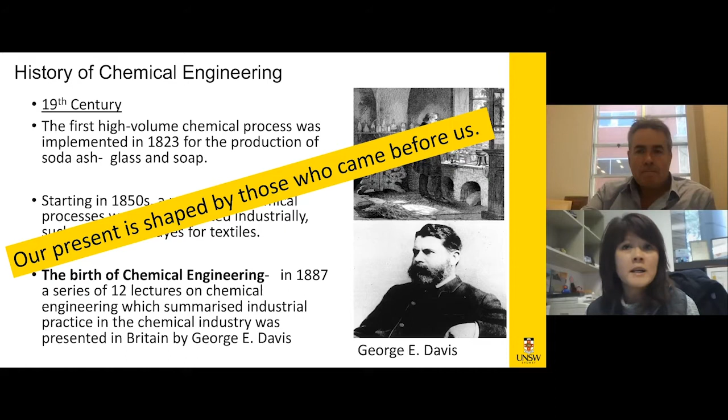When we're talking about the past of chemical engineering, the history of chemical engineering, you always hear the name George Davis. I'm sure during these last few days you've already heard his name and about the birth of the chemical engineering field back in 1887. I just want to stress that we can learn a lot from our past. Our present is shaped by those who came before us, and our future is also shaped by what we learn from the past and present times.

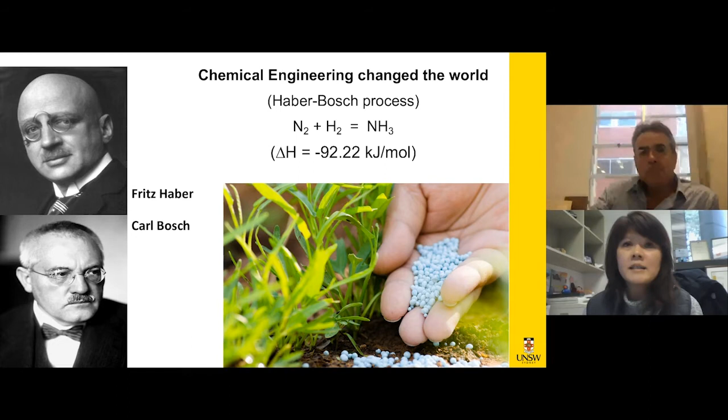As chemical engineers or chemical engineering students, I'm sure you've heard of the Haber-Bosch process. If you haven't, you need to check it out, because you will not be able to graduate chemical engineering before knowing the Haber-Bosch process. This is probably the most significant breakthrough in chemical engineering, a process that changed the life of everybody in the world. It requires a lot of energy, but it sustains life on our planet.

That's the reason we have 7.8 billion people now in 2020. The Haber-Bosch process was actually developed back in 1900, when we only had 1.6 billion people, and the population has grown thanks to the ammonia produced from this process. So today, when I'm talking about energy, I think it's important to reflect on this process, because it requires a lot of energy. As chemical engineers, we need to rethink how to develop more sustainable processes, to make sure we have a way of life and processes that are sustainable, and that we'll be able to make a better future.

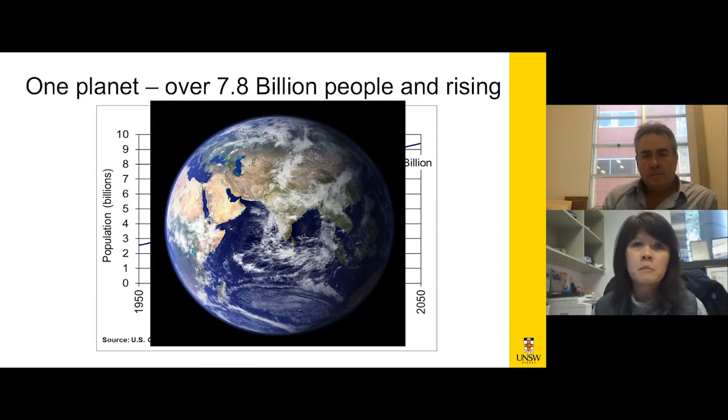I'd also like to show this slide, taken from ChemEng Matters, Chemical Engineering Matters, just to stress that chemical engineering does matter. The processes that we learn and develop are actually used in our daily life. Over the last couple of days, you've already talked about water. Chemical engineering processes are very important for solving the global challenges - water, energy, food and nutrition, and health and well-being. Chemical engineering is a vital part of this jigsaw of our 21st century living.

Today my talk, as Tom and Olivia already mentioned, is about Power to X, or another way I can call it is harnessing the solar energy for chemical processes.

Since the beginning of my research career, I've always been passionate about research for sustainability. When I started, I was looking at how to develop chemical processes that can solve environmental problems, which is why I worked on water purification. The science and principles there can also be used for energy applications, and that's how I started my work in energy.

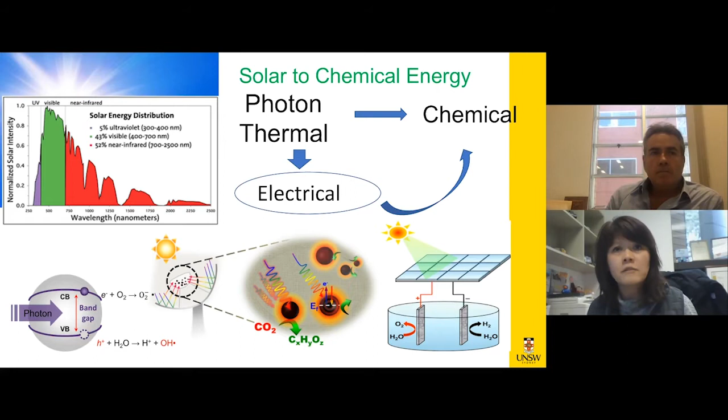In my research, I'm actually looking into designing catalyst materials—unfortunately the animation doesn't work, but what I'm trying to explain is there are a lot of ways to do this. Again, chemical engineering skills are very important here; there are many ways we can make catalysts.

One way is flame synthesis, where I use the flame as the reactor to make the particles. The design of the catalyst is very important, because it's one of the keys to effectively harnessing the sun's energy and converting it to chemical energy.

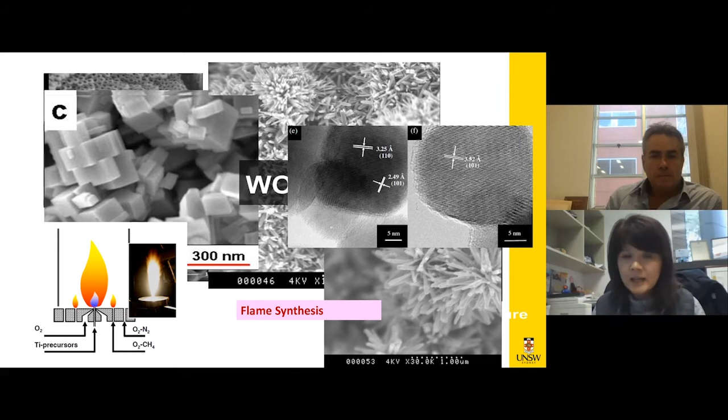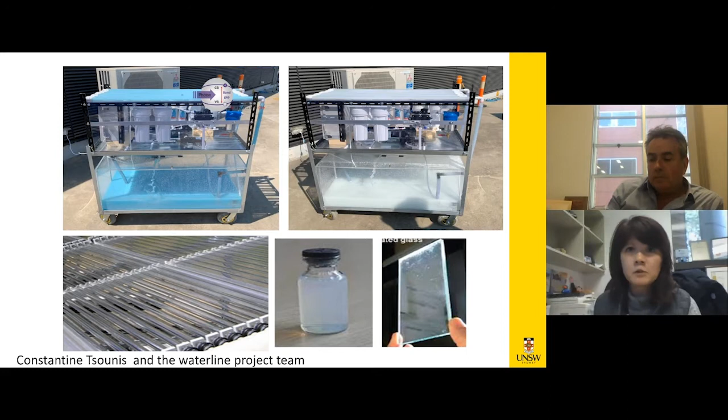As chemical engineers, our work isn't just designing the catalyst—we also have the skill to design reactors and build the reactor system. This is very important because it differentiates us from chemists or material scientists: our capability to design a reactor system in order to really drive the reactions effectively.

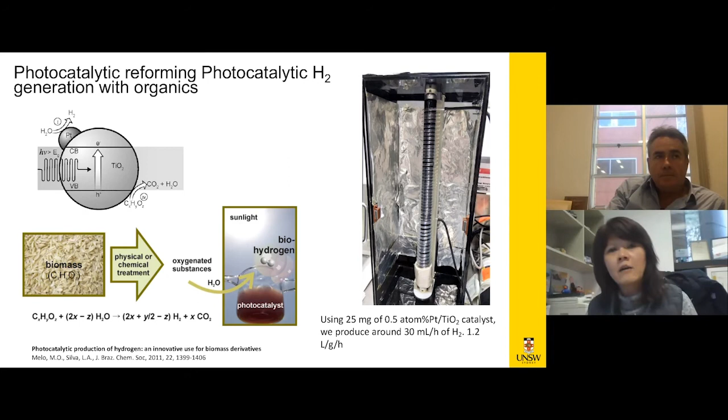Other ways of harnessing solar energy to convert it to chemical energy, like making hydrogen, include converting biomass and waste materials to extract hydrogen from it. We can use sunlight directly with a catalyst to extract hydrogen from biomass, or use sunlight to generate electricity, then use that electricity and a catalyst to convert biomass to hydrogen. So we're using abundant solar or renewable energy, combined with chemical engineering processes and designed catalysts, to extract the hydrogen.

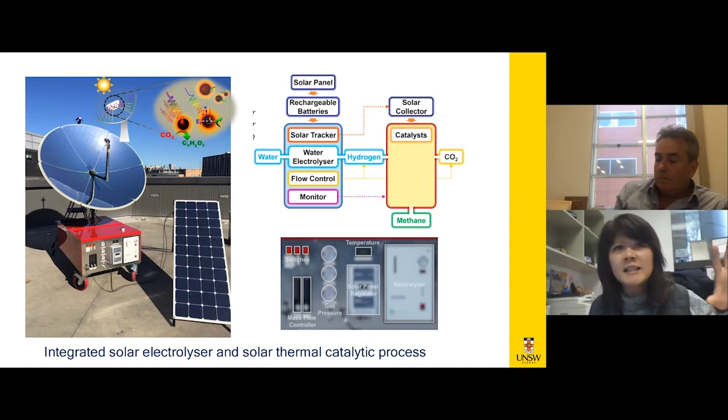So in this process, the main ingredients are water, carbon dioxide - which is waste we want to get rid of anyway - and energy from the sun only, and that can be used to produce methane. Methane is a chemical building block for a lot of chemical industry, and it's also an important gas for energy purposes. So that's one of our power-to-X examples, harnessing both the heat and light of the sun to drive the reactions.

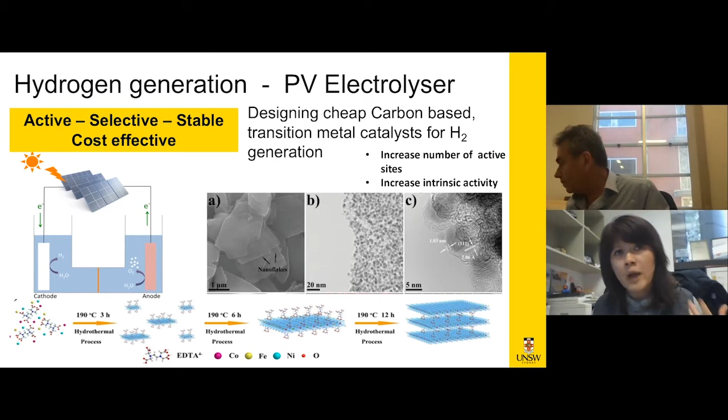Another project we have looks at harnessing solar energy to convert to electricity, then driving a catalyst process to produce hydrogen. A lot of our work focuses on making hydrogen this way, and on designing active, selective, and stable catalysts. These are the key things important in chemical industries - we have to be cost effective, stable, and selective for the chemical reactions we want.

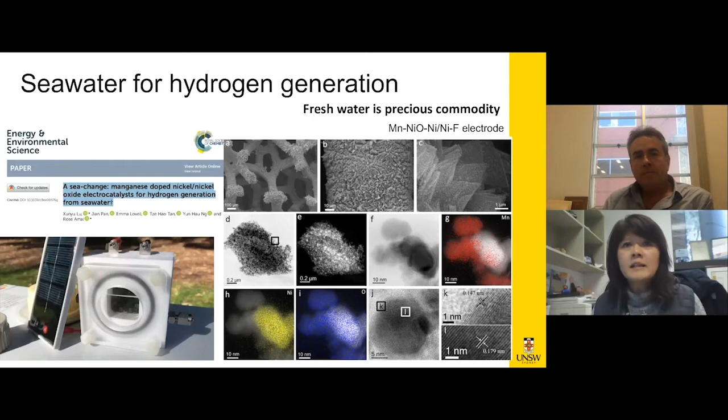When we talk about these processes, we also have to think about sustainability. Fresh water, especially in New South Wales, is a precious commodity, so when talking to industry, one issue is whether you actually have water to use as a raw material. But we have plenty of seawater, especially in Sydney since we live in a coastal area. So we're also developing ways to convert seawater and use it as our source for making hydrogen. Designing the catalyst system for this is very important because seawater is much harsher than fresh water.

And this is very important because I think this is the future of chemical processes, looking at converting small abundant molecules to chemical products rather than relying on fossil fuels. A lot of the things that we're doing currently in the chemical industry rely on fossil fuel, for example, to make syngas, or steam methane reforming to make hydrogen. But we can also look into other things that we have in abundance, like the carbon dioxide that comes out from the chemical industry. And by doing that, we can actually close the carbon loop as well. So I think it is important for us to really look into what we can do in the future, utilizing our renewable power.

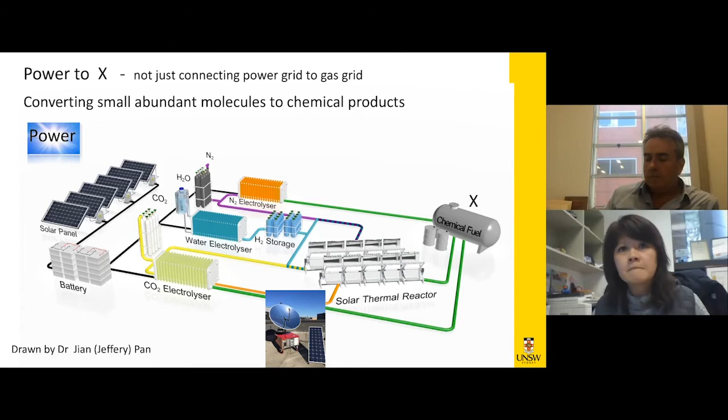At the beginning of my talk, I mentioned the Haber-Bosch process, ammonia synthesis. This process has been there for more than 100 years. So the process was there yesterday, for 100 years, and still today, but it's a technology of yesterday. They get the hydrogen from methane, the steam methane reforming, and the methane is actually coming from fossil fuel. The nitrogen is coming from the air, so that's fine.

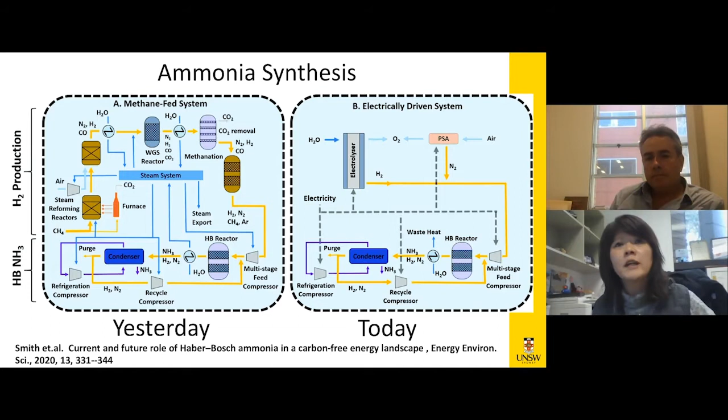Today's technology, which a lot of the industry started to look into, is instead of using methane to extract the hydrogen, they're looking at using an electrolyzer to get the hydrogen. The hydrogen from the electrolyzer then reacts in a similar process to the Haber-Bosch process to produce the ammonia. So instead of using fossil fuel, now we can use clean, green hydrogen to make our ammonia.

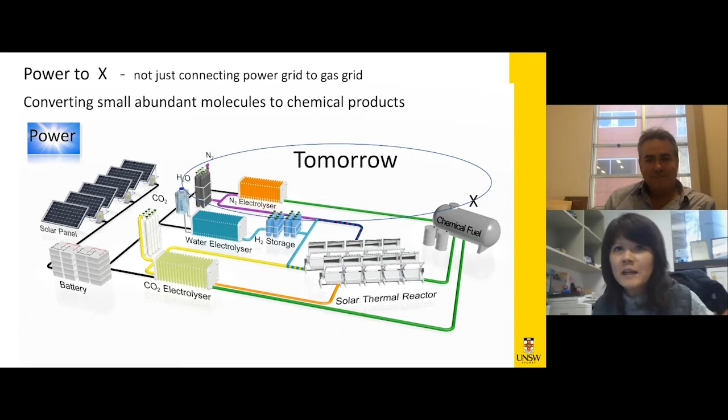And what I see in the future, the tomorrow way of making ammonia to sustain life, is that we can also use nitrogen, but instead of having to use high pressure, 200 atmospheres, and high temperature, 450 degrees Celsius, we should be able to use an electrolyzer with renewable power and operate at low temperatures and low pressure to convert nitrogen and water, using the catalyst in the electrolyzers to produce ammonia. This is something I foresee perhaps not immediately tomorrow, but maybe in 20 years' time, and the chemical engineering students here will probably be the ones who develop this further. So with that, I'd like to thank you, and I also thank my group members, including Con.

For me, I consider myself the past already, my group members the present, and you, the audience, the future of chemical engineers, and I believe that the future is bright. This particular quote is from Svante Arrhenius. I think you all know the Arrhenius equation, which relates the reaction rate constant with temperature. In 1900, he said humanity stands before a great problem of finding new raw materials and new sources of energy that shall never become exhausted. In the meantime, we must not waste what we have, but must leave as much as possible for coming generations.

It was supposed to be an animation here, and I was not supposed to show you Arrhenius first. I was supposed to show you the quote and get you to reflect that this quote is very relevant for today, and I'm sure it's going to be relevant for tomorrow. But it's actually a quote that Svante Arrhenius posed over 100 years ago.

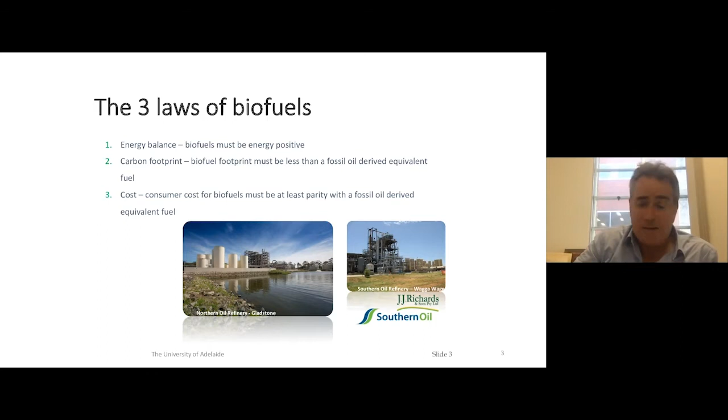And basically, it's got to make money. So a company is not going to use or produce biofuels unless they can make a profit. This is the big challenge.

So what's a good feedstock? So we've been looking at hydrothermal liquefaction, which is a high temperature, high pressure reaction where we put organic material to a high temperature of 350 degrees Celsius and a pressure of around 200 bar. So we take the wet biomass to just below the critical point of water. Through the heating curve to that point, we get depolymerization of the organic materials and they reform into a crude oil-like product. So it's a very interesting process, very complicated, but it will turn wet organic material into a crude oil that can be further refined.

So I mentioned before that we were looking at microalgae as a feedstock for biofuels. It's too expensive to grow algae for fuel. But during that journey, I came across hydrothermal liquefaction, but we also came across biosolids. So biosolids are dried municipal wastewater sludge.

So during a conventional wastewater treatment process, we grow bacteria to remove soluble organic material, carbon, from the wastewater. So we grow the bacteria in the water to clean the water, but we produce biomass. This is called sludge. And the sludge has to be removed from the wastewater treatment process, and it's a big waste problem for the industry.

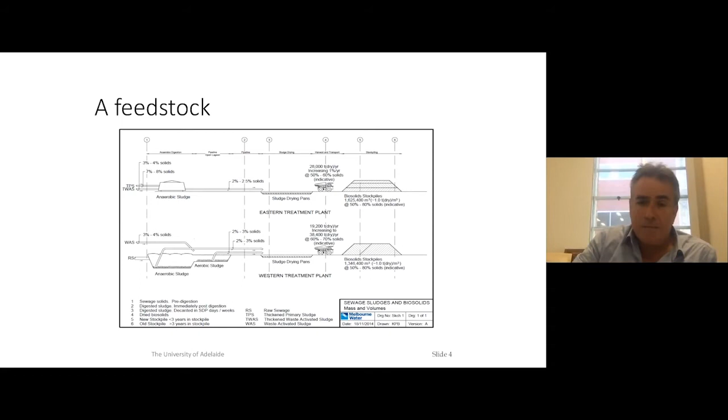It's left there for about a year for the water to evaporate, and then the remaining sludge is scooped up and stockpiled. So these stockpiles are massive, and they self-combust in summer because they're so full of energy. Typically, they're around 40% inorganic material, but the older stockpiles get as high as 70% inorganics. So they're quite variable, but full of high-energy organic material.

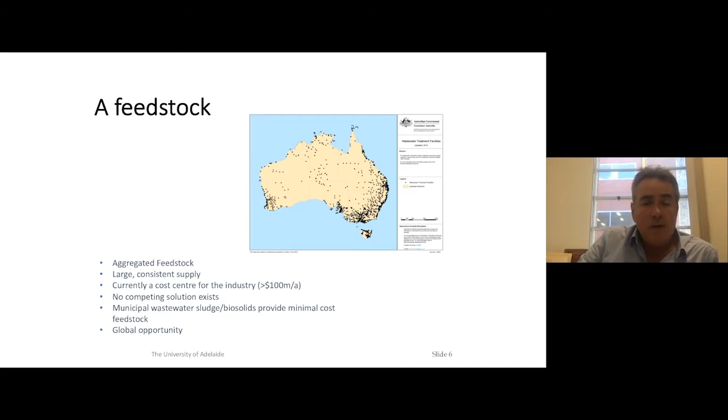So if we look around Australia, biosolids are produced all around the country in different volumes. The economics, really, we need to be looking at the larger stockpiles to consider converting those wastes to a fuel to be economically viable. But globally, it's a massive opportunity and a massive problem. So the industry spends around $100 million per annum just managing biosolid waste. So it's a great opportunity to come up with a new waste management tool, but also to convert this waste into something useful.

So the challenge that we've been undertaking for the last few years is trying to develop a technology based on hydrothermal liquefaction that is scalable and can take this feedstock and convert it into a renewable crude oil in a continuous process. We've worked at different scales from bench to pilot to commercial demonstration, and the economics so far, we would require a tipping fee of around $160 per dry tonne of biosolid waste.

So I showed you a picture where the material is produced around 2 to 5% solids. So you can imagine to get a tonne is going to take a lot of litres of the sludge waste to get that tonne of biomass that would require only $160 to be paid to dispose of it. So it doesn't sound much, $160 a dry tonne, but it is a lot of money for the industry. So if we were to just convert this biomass into oil, the economics probably wouldn't stack up. So we need to look at valorizing all of the product streams, and I'll talk a bit more about that.

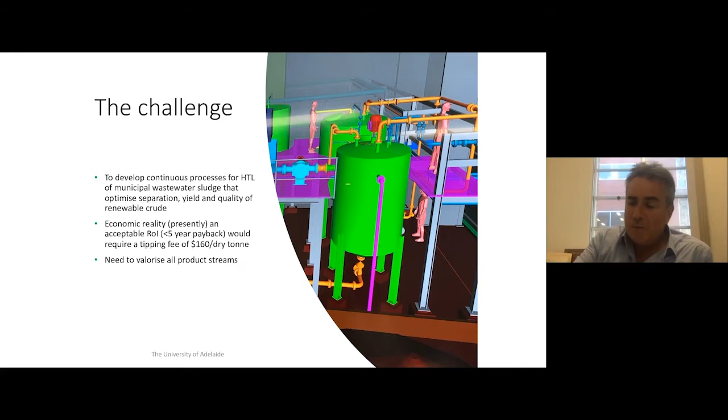And another economic reality is businesses are interested in this technology, but businesses nowadays would like a return on investment in a period of 5 years or less. So that's a big challenge. Investors want their money back as quickly as possible and are not interested in long-term investment where the payback is greater than 5 years. So that's quite challenging.

But one of the challenges of putting these types of waste through hydrothermal liquefaction is it's not just organic material. It's all the inorganics. It's all the heavy metals. So you've got quite a contaminated aqueous phase post-HTL that needs to be managed. And you have to separate the crude oil from that aqueous phase, which also is not trivial. But once you've separated the oil component, that can be readily refined in the standard refinery processes.

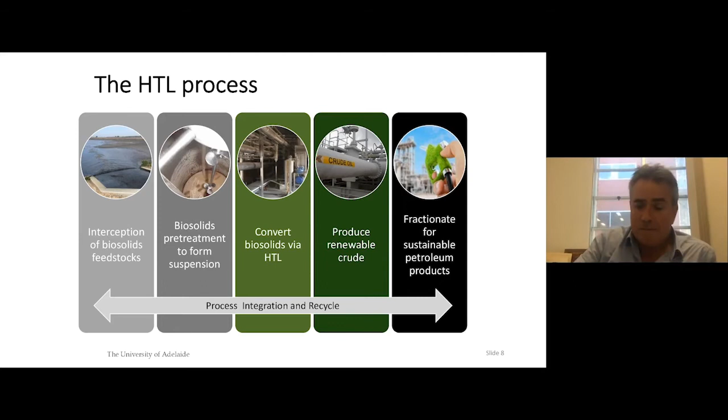So we're currently funded by ARENA to build and operate this demonstration plant. Our industry partner, I should have mentioned it before, is Southern Oil Refining. So this company is based in Wagga and they have an oil refinery in Gladstone, Queensland. Their business was built on waste to value.

So most of their business is recovering dirty lubrication oils, removing the contaminants, and reselling the lubrication oil back to the market. So lubrication oils don't lose their lubricity when they're used, they just become contaminated. So you can imagine in Australia, we use a lot of lubrication oil in the mining sector and the heavy transportation sector. So Southern Oil is about a $100 million business, and they are quite successful at recycling waste oils.

One of their wastes is dirty fuel. So they got interested in renewable fuels to add value to their dirty fuel that they recover from lubrication oils. So I've been working with Southern Oil for a few years now, developing the hydrothermal liquefaction technology for managing the biosolid waste streams.

So one of the challenges about developing new technology is what we call the valley of death. So at universities, we have a great time, we get research grants, we can do wonderful things, but we work at early development stages. So we call it technology readiness levels. It's a term that we've plagiarized from NASA. So they talk about TRLs. TRL 1 is pure research. TRL 9 is when you're about to commercialize your technology. So as researchers, we work around TRL 1 to 3.

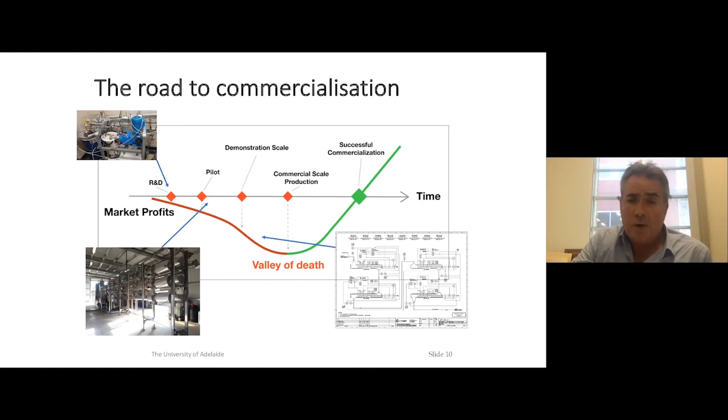It's very challenging. Fortunately, in Australia, we have ARENA who fund projects in the valley of death. The government realizes that to get private investment to develop new technologies is very difficult in Australia. So they created ARENA many years ago that will fund renewable energy projects through that valley of death.

So every day, B-double trucks are filling up with this waste, going off to a landfill to dispose of this waste. I believe they pay about $130 a wet ton. So they're very concerned about us needing $160 a dry ton to make hydrothermal liquefaction viable to manage their waste. And this is why we have to look at other products in addition to a renewable fuel.

So we're looking at these different biosolids wastes. We're looking at how do we integrate hydrothermal liquefaction technology into a standard wastewater treatment plant. We're looking at the effect of the polymers that the industry uses and how does that affect the oil quality. As I've mentioned, in the 20% solids, you've got 80% water. We don't want the water.

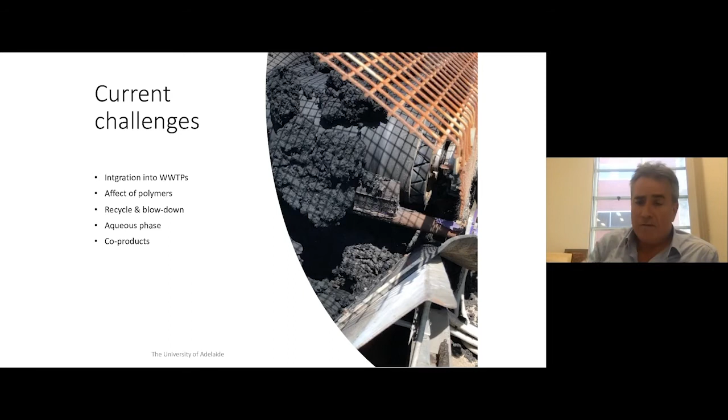So I've got about 8 PhD students currently working on the different areas of research around HTL. We're now very much interested in catalysts that we can add to the HTL reactor to improve the quality of the oil, to remove heteroatoms such as nitrogen and sulfur, reduce the acidity, etc. So there's still a lot of R&D to be completed with HTL in parallel to scaling up the technology.

So I'd like to conclude my talk. And I'm sure Rose is the same, she said this, that the young chemical engineers, which is you, will change the future. We need you to design and operate sustainable processes. And as you know, it's getting harder and harder to get career jobs nowadays. So really, as young engineers, you need to create your own jobs, create your own companies. And the solution is if we can produce cheap, clean, renewable energy, this will drive the future economies of the world, and I think that is your challenge.

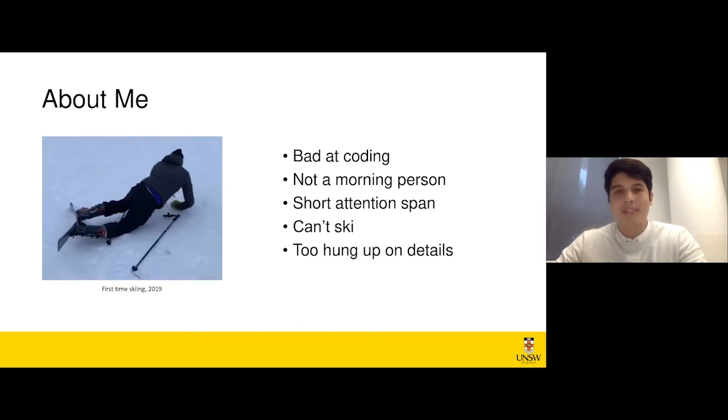And it's really about playing with your strengths, acknowledging your weaknesses, and just being yourself. So over the last couple of years, something that I've learned is to just really be calm and confident and be yourself, and you'll be fine at the end of it. And the mantra goes fake it till you make it. And I used to believe that, and I used to think that was something that you needed to do to fit in. But as I have grown personally and professionally, I realized that just being yourself is key, and being able to laugh at yourself is something that's really important. So if you ever feel out of place, don't. Everyone's really in the same boat as you.

And so I want to talk a little bit about Power-to-X, and Rose introduced this really well earlier, so I won't add too much detail to that here, but this is sort of what chemical engineers' fantasy is in terms of how we can integrate renewable energy generation into viable chemical processes.

Right now, Australia is one of the world leaders in terms of solar cell development. We can make really, really efficient, cheap solar cells that produce really cheap electrons, and you can get these electrons for less than 3 cents per kilowatt hour nowadays. So if we want to really integrate renewable energy into industry, we need to make sure that we have the processes that are available for that.

Not everything can be electrified. So, for example, we can take those electrons from the renewable energy generation. We can pass them through a water electrolyzer to produce hydrogen. We can pass them through a nitrogen electrolyzer to produce ammonia or fertilizer, as Rose talked about before. Or we can even use waste CO2, and with those electrons, create things like methane, methanol, formic acid. All of these things are really important energy carriers and fuels and chemical feedstocks that we can use in industry. So by using this sort of P2X pathway, we're really coupling the end need - for example, a chemical feedstock which can be used to synthesize other chemicals, or used as a fuel directly - with the really cheap electrons that we get from the renewable energy side of things.

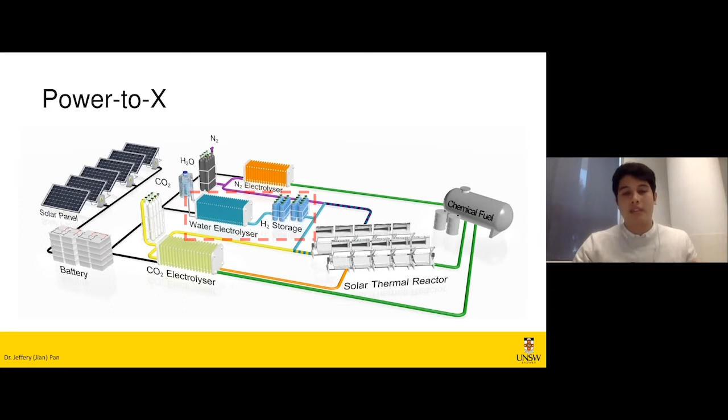So for that, we really need to maximize the use cases of these end chemicals. I'll be focusing a little bit on hydrogen here. I find hydrogen really interesting because it's sort of the cornerstone of the whole P2X concept, where hydrogen can be used as a chemical feedstock to make other things like fertilizer, methanol, urea. You can use it to heat things up directly for industrial processes or even domestic heating. And you can use it as a fuel as well, so it's a great replacement for diesel once we have the infrastructure up for it. You can even use it, or they're trialing applications, in aviation.

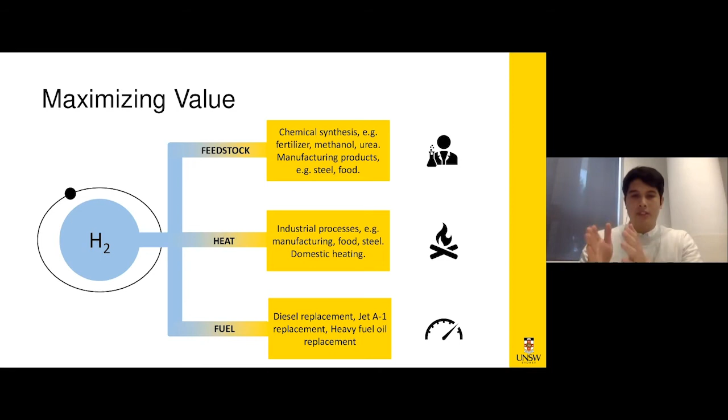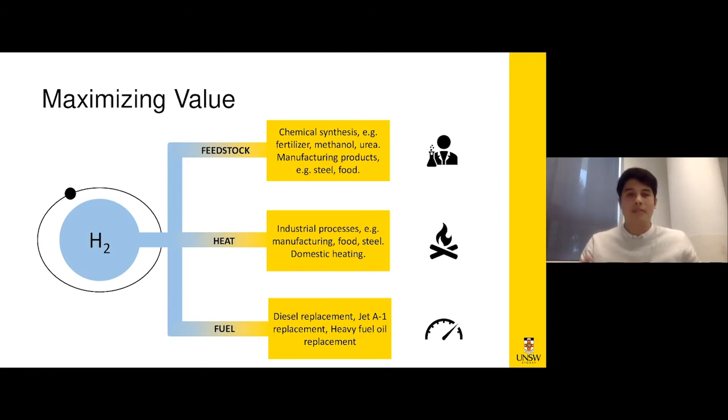So what that really means is that the economics of that P2X pathway doesn't really fall down to just hydrogen as a commodity on the commodity market, because that would be worth very low amounts, but rather what hydrogen can be used for. For example, if it's replacing diesel and it's cheaper than diesel, the cost is not so much how much you can sell hydrogen for, but how much money you save by using hydrogen as opposed to diesel, which is quite expensive, as Professor Lewis was talking about before.

So what you'll find is that there are two main factors that really define how much hydrogen is going to cost to make. Firstly, the average price of electricity, which, as I mentioned, because we have so much solar capability and we're really driving the cost of electricity down, we'll leave that to the PV guys to sort out. But the other thing we can have control over to make this process cheaper is reducing the amount of electricity required per kilogram of hydrogen. At the moment, industrially, it's about 50 to 55 kilowatt hours required per kilogram of hydrogen. But if we can drive that down even to 45 kilowatt hours per kilogram, we can really reduce the cost of hydrogen to about $2 per kilogram, which is what the National Hydrogen Strategy wants us to aim towards.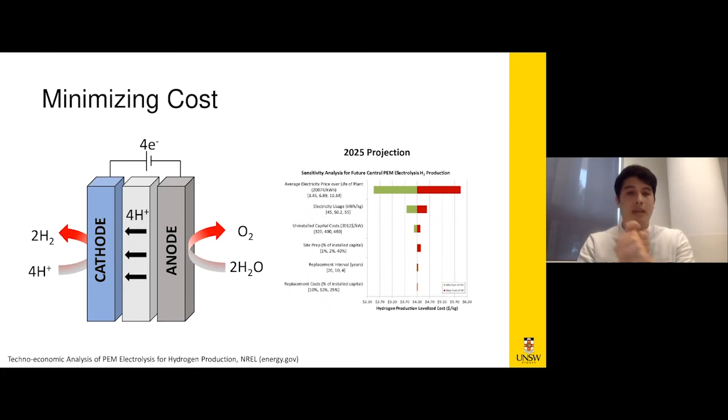So in order for us to really realize P2X as a real possibility, we need to, A, make sure that we're using the right hydrogen in the right use cases and applications, and B, that we can minimize the cost of hydrogen production.

And this is where SwitcH2 comes in. I might add that during our final year design project, when I was an undergraduate chemical engineer, we were required to optimize both the carbon footprint and the cost of a very large brewery operation.

That inspired us to dig a little further and think about the challenges a brewery actually faces. The first is that they require so much energy, about 40 kilowatt hours per 100 liters of beer, equivalent to about 75 kilograms of carbon dioxide released per hectoliter of beer. And when you think about the distribution chains of a brewery and how much wastewater is produced, it's about 5-to-1 wastewater per liter of beer produced, and that's all really rich, highly concentrated organic waste with really high enthalpy behind it.

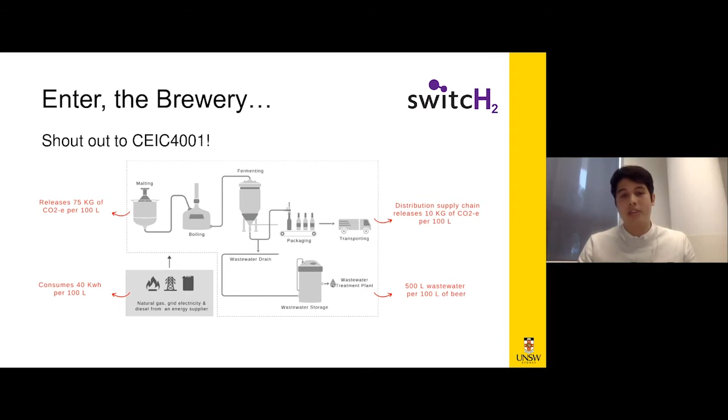You can start to see a problem there. So the opportunity came for us when we realized that most of the energy demands for a brewery are actually satisfied currently by natural gas and LPGs. These are liquid and gas energy carriers.

When the brewery operates at nighttime, when they don't have access to solar energy, whether on-site or bought directly from a solar farm, they revert back to grid energy. At the same time, they produce copious amounts of wastewater, again about 5-to-1. So if a brewery produces 1 million liters of beer, they have about 5 million liters of really rich, high enthalpy wastewater that's not being used.

So when we started thinking about how we can really optimize how hydrogen is used and what we can actually use to make hydrogen, the brewery really clicked for us. You see the two things on the left are what hydrogen can actively replace, while the thing on the right is what we can actually use to make hydrogen. And that's really where SwitcH2 came alive.

We designed a concept for a wastewater electrolyzer. So instead of splitting water, which is what traditional electrolyzers use, we designed specific catalysts in the Particles and Catalysis Research Group so that we can actually oxidize the organics in the wastewater of a brewery. What we're finding is that thermodynamically, it's actually much easier to split these organics up as opposed to splitting water. So by using wastewater as a feedstock for the electrolysis process to produce hydrogen, you can reduce the overall energy requirement by up to 30% compared to the state of the art.

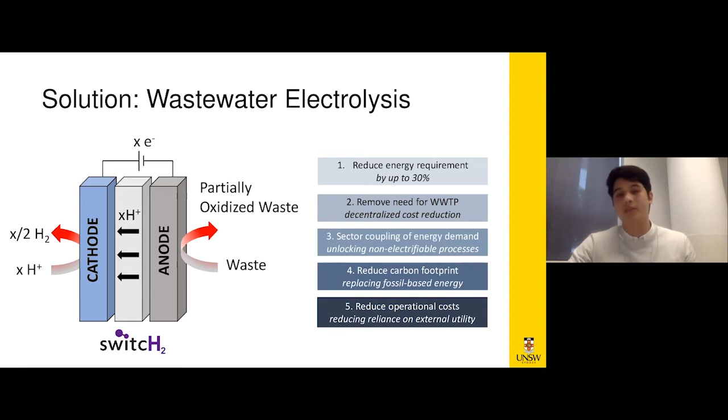This means we can take that renewable energy, convert it into hydrogen, and apply it into a brewery. By avoiding the use of LPG and natural gas, we can reduce the carbon footprint of the brewery. And because we're not relying on external forces and don't need to buy those energy carriers, we can actually reduce the operating costs for the breweries.

The idea of SwitcH2 is really to identify that specific use case of where hydrogen can be used, a brewery, and integrate that smoothly into the actual brewery, because that systems integration step is a really big barrier towards hydrogen's implementation. We also want to reduce the cost of hydrogen production by developing and translating the catalysts that we make in the lab, which work well for wastewater degradation, and applying that into an actual application.

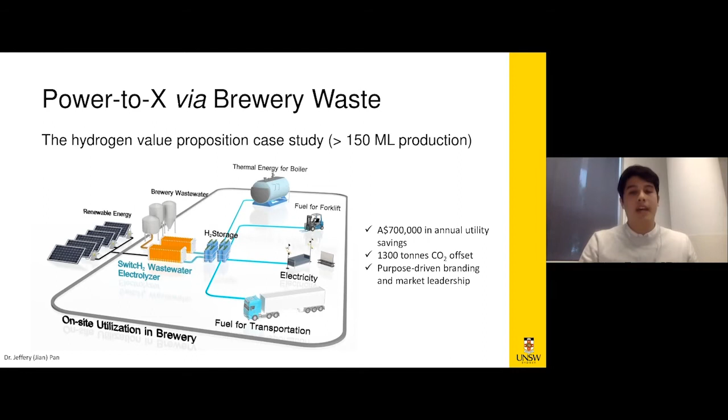We're currently working on a feasibility study with one of the larger breweries in Australia, a brewery that produces more than 150 million litres of beer every year. You can really see some substantial cost savings and CO2 offset, and at the same time they become market leaders in becoming a more sustainable FMCG economy, really appealing to purpose-driven customers.

In terms of where we've taken the startup, last year we came up with the idea, did some tests, and ran some simulated brewery wastewater in the lab. We were lucky enough to win the Peter Farrell Cup from UNSW, and then we were funded by the StartMate Accelerator Program, a venture fund backed by the Atlassian Family Fund, to progress our technology further. We've since tried real brewery waste and scaled up about 200 times, so now we can process about 20 kilograms of hydrogen per year in our system.

At the same time, we spent quite a lot of time making sure we had a really robust product-market fit, because at the end of the day, breweries aren't interested in hydrogen, they're interested in brewing beer. So we had to make sure we came up with modular, autonomous designs that are able to fit in with the current brewing culture and practice in the industry.

We're currently working with some of the major breweries to look at a pilot scale implementation next year or the year after, depending on how nice or mean COVID is to us. That'll be producing about a ton of hydrogen per year. We're also lucky to have secured some university and government grants to fund our progress so far.

I just want to acknowledge this all really came from our work in the Particles and Catalysis Research Group, where we were able to take ideas from the lab and be supported by Rose to push that out there and make solutions out of it. I also want to acknowledge my two other co-founders, Bajil and Kushal.

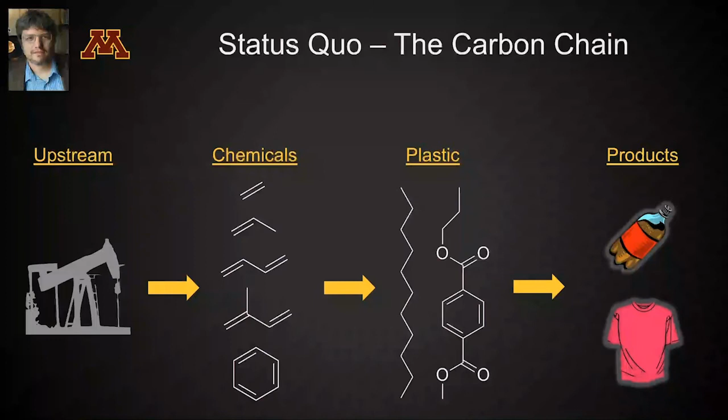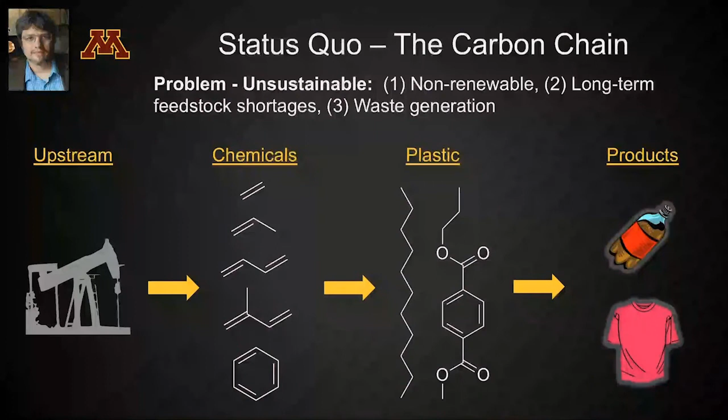And of course, the other problem is, what do we do in terms of feedstock into the future? What we would like to do is find things that are more renewable, that won't have long-term feedstock shortages, and something that we can use that can be reprocessed, used again and again in a sustainable way.

Now, one approach to this is to take a completely different feedstock. We could take things like trees and grasses, non-food biomass, and from that make the same chemicals we already get from petroleum and natural gas, things like ethylene, propylene, and benzene. Then make the same plastics we already have, make those into the products that we use right now, like bottles, shoes, shirts, cars, food packaging, all the things we do.

But then also find a way to unmake them, so convert them back to their plastic polymer, or convert them back to the chemicals and use these in a closed loop. So once we've made it, we unmake it, and then we use it again and again and again in a sustainable carbon cycle.

And there are many different chemical paths we can use to do this. Some have more steps, some have fewer steps, but each step in the path adds cost. And so we need to find the sequence of steps that let us get between these two chemicals in a way that's lowest cost and come under the sale price, so at the end of the day when we sell it, we can still make money, and it'll become a viable, sustainable process. Now, how to do that? That's the chemical engineering process challenge.

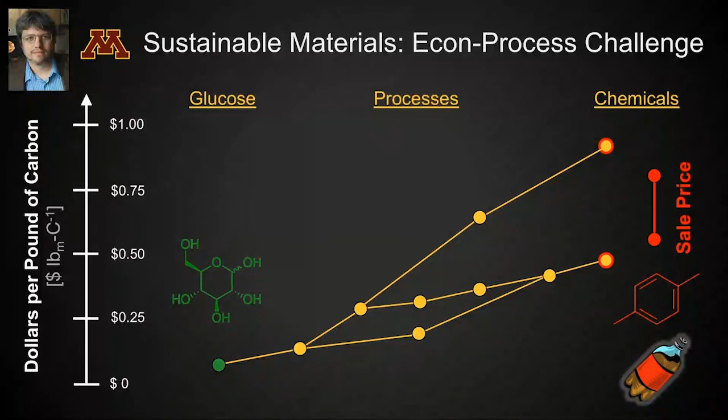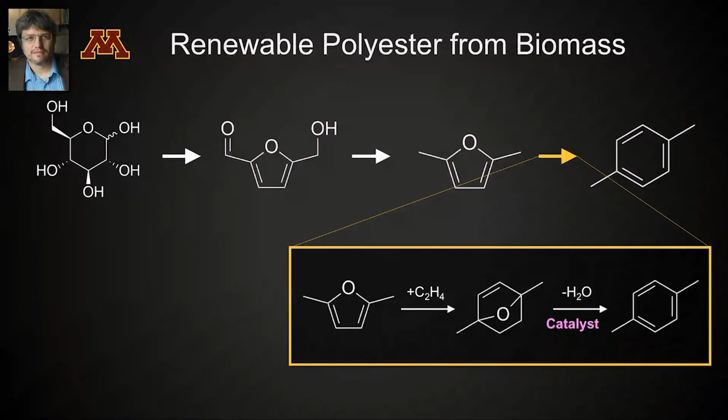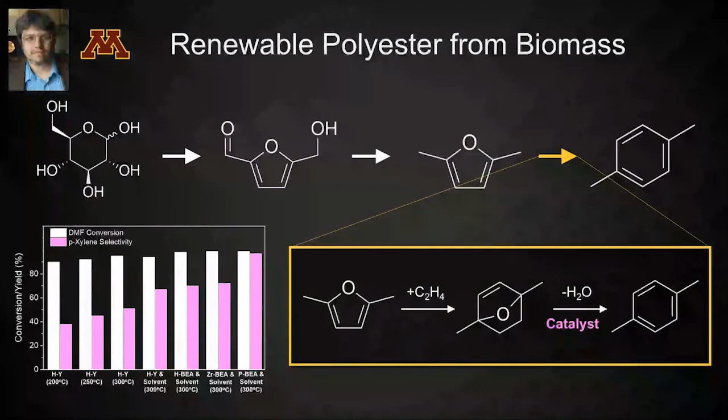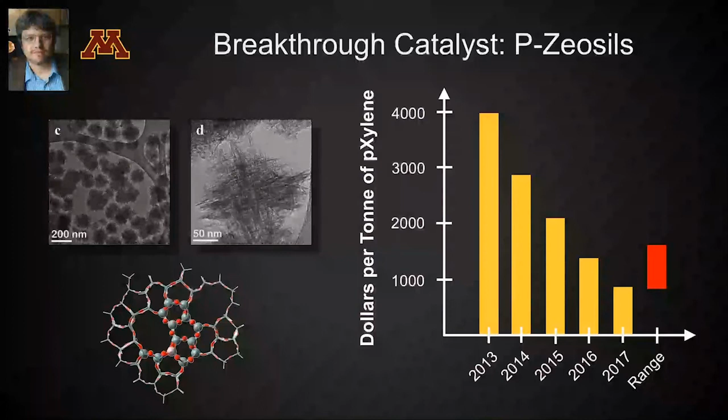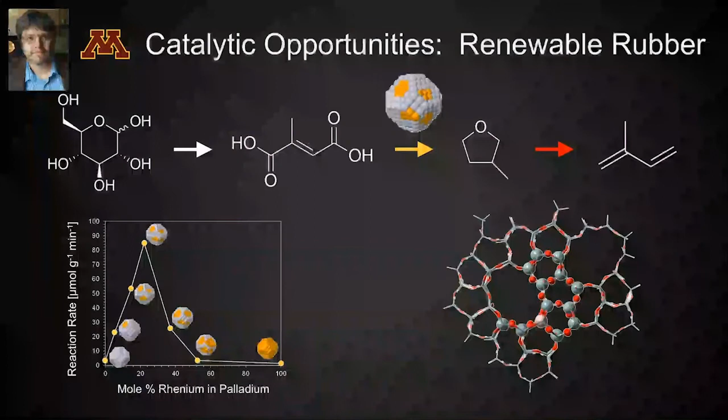We'll take that, we'll use fermentation to make the second molecule you see on the right, diacid. We'll use metal catalysts to convert that to a 5-atom ring again. And then the final step, we'll dehydrate that and ring open it to make isoprene.

Now, we've developed that technology in terms of the chemistry, but then we also need to develop a process technology. So we'll take those reactions, we'll convert them using a computer simulation, in this case, design reactors and separators and process sequences. And then we'll optimize that to reduce the cost for both the capital cost to buy all the equipment to install it, but also to operate it.

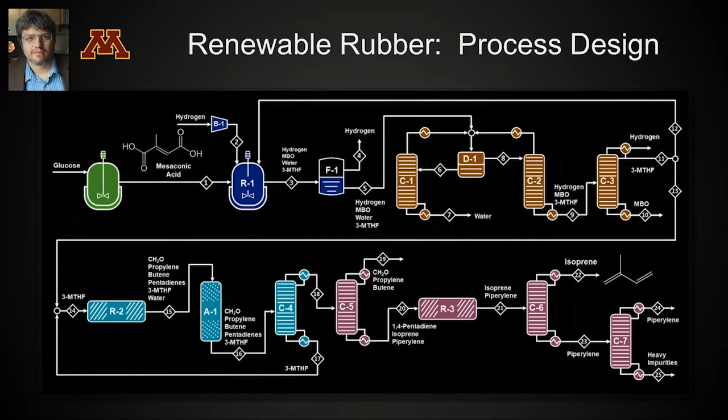You can see here all the different parts of the chemistry show up in different colors and contribute to the cost in different ways. Now, ultimately, we can take that design and say, what's the cost of everything, and how does that add up over time compared to conventional prices?

And isoprene is very interesting because it's one of the key components in renewable car tires. So we can make renewable isoprene from biomass, then we can make renewable car tires around the world and all sorts of other renewable rubber applications.

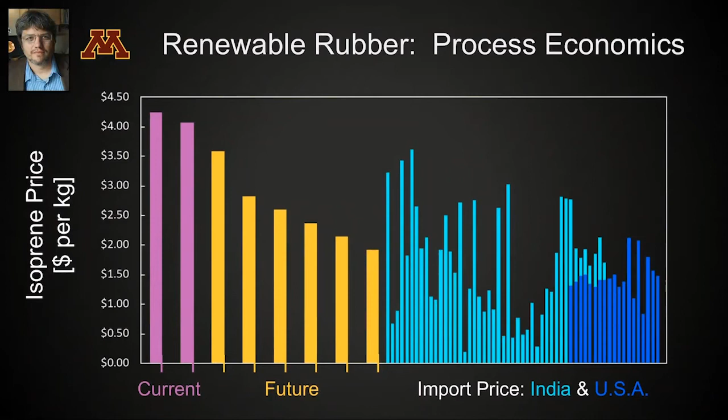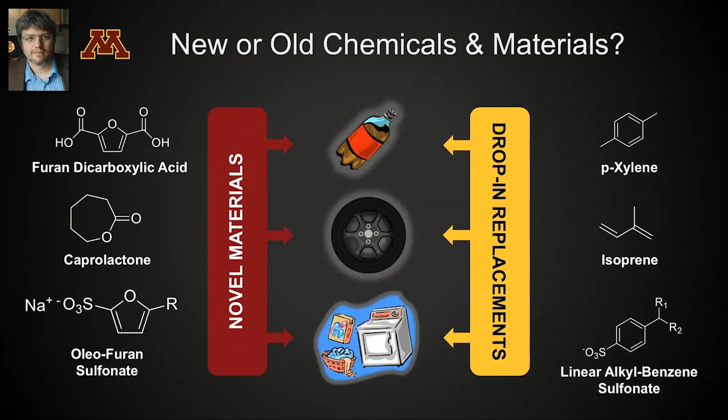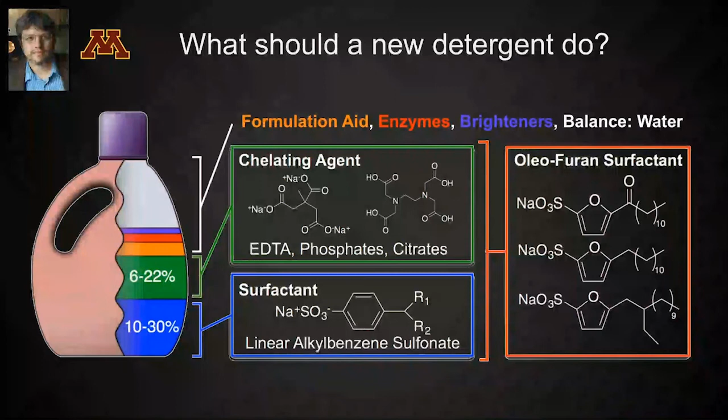So we add in all sorts of other chemicals called chelating agents that grab all the metal ions and let the surfactant work. We're going to propose a new class of molecules here in red that do everything that the blue and the green do at lower concentrations and better performance, that are made from biomass. So here's these molecules. They come in several tunable structures.

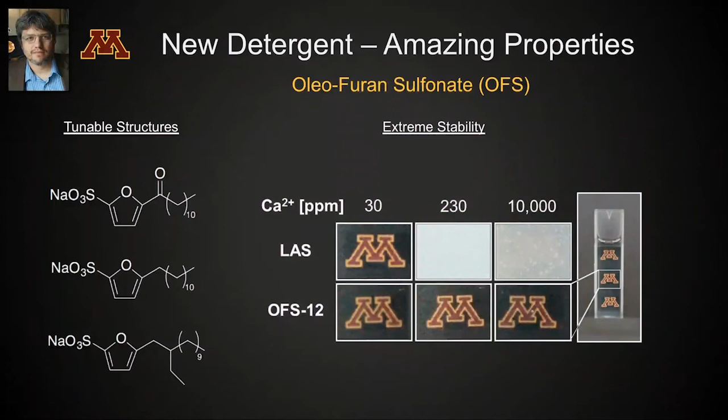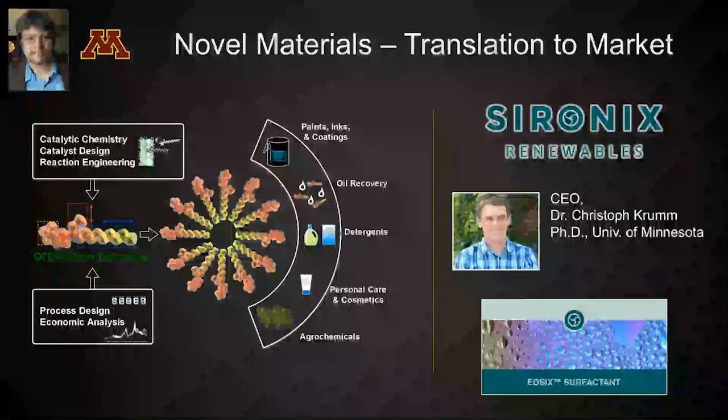So because this technology was so exciting, my student and I that helped invent this formed a startup company called Sironix Renewables. You can read about them online, and they market these bio-derived molecules as the EOSIX surfactant.

So ultimately, what's great about biomass chemicals is they have a bright, sustainable future that continues to grow every single year. We already know that we have the ability to remake all the chemicals from the fossil fuel-derived industry in the next 2 decades. The chemistry is there. And what's happening now is that the economics are getting better every single year to the point where we'll be able to compete without any sort of subsidy with fossil fuel-derived chemicals. We also know that new chemicals can outperform existing fossil fuel-derived chemicals.

And in this case, because I'm from the University of Minnesota, we study this because at Minnesota we have all sorts of forestry products and agricultural products that let us be a leader in sustainable materials. But of course, places around the world can compete just as readily as Minnesota. And these technologies, there's nothing special about Minnesota. They can be used in every continent around the world.